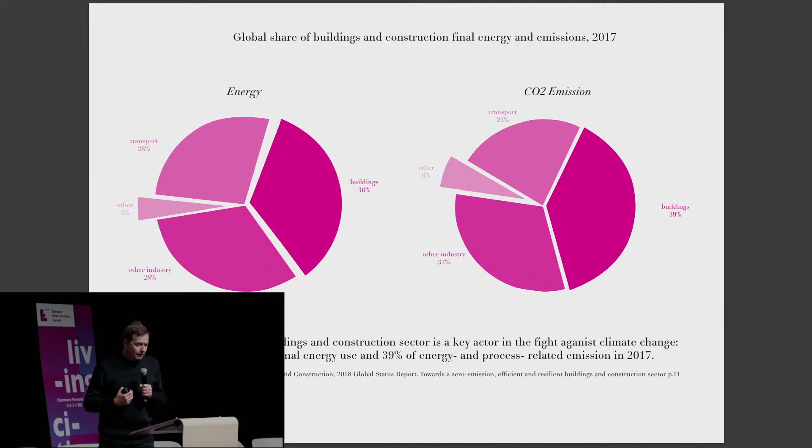So when we are building a house, it's to create a microclimate. Then there is this new condition today. We can see here on the right that 39% of the CO2 emission that is the cause of global warming are coming from the building on the global scale. So it means architects, we are on the front line to fight global warming. And so this is something that is completely our task today.

So we can say, okay, the conditions are climatic. The reason of architecture is climatic, so why could the design not be climatic too? Why we cannot design by convection, conduction, evaporation? Why we should always design with symmetry, with geometry, but not with emissivity, for example? So I'm presenting a series of projects, and I want to create a link with the history of architecture.

I did this exhibition 2 years ago. It will be present in January in Lyon next year, in 3 months. And in this Histoire naturelle de l'architecture, I start to read again the history of architecture based on climatic reason.

And if we take this very famous house from Andrea Palladio, it's interesting because when I was a student, we have only a kind of superstructural approach, an aesthetic approach of this house, and we never understood that it was in reality a kind of climatic machine. And it's explained like that in the book of Palladio.

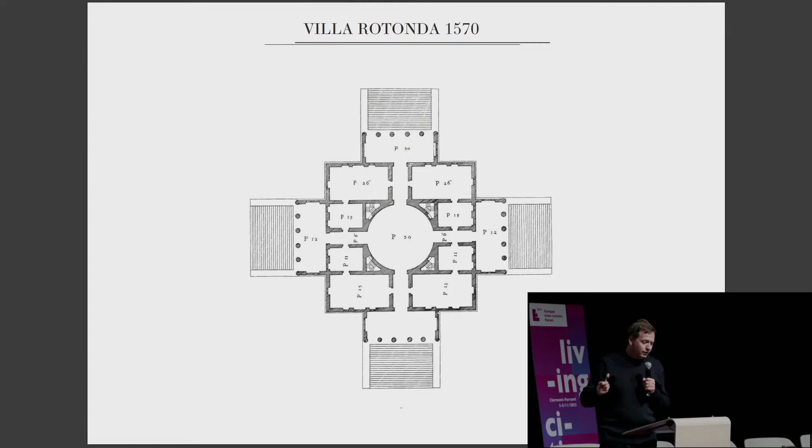And then the portico is protecting from the sunlight, and the sala in the middle is a dome. And this is like by convection, the hot air is always moving up, and so you have to open, and then you remove the hot air, and you keep the ground cold. And on the ground, you have this kind of grid that lets the cold air come from the underground.

So of course the inspiration was that, and it's quite strange because when I was a student, I always heard about the hole in the Pantheon about spirituality, but in reality it's just to let the hot air go out. If not, you are like a cocotte minute, a pressure cooker. So you need to open it. This is a grid for the cold air, and that comes from the underground.

So we did a project based on that. Two years ago, we got the third prize for that in Lausanne. It's called La Climathèque. The building is a small square, so we try to minimize the footprint on the site. It's the small square on the top.

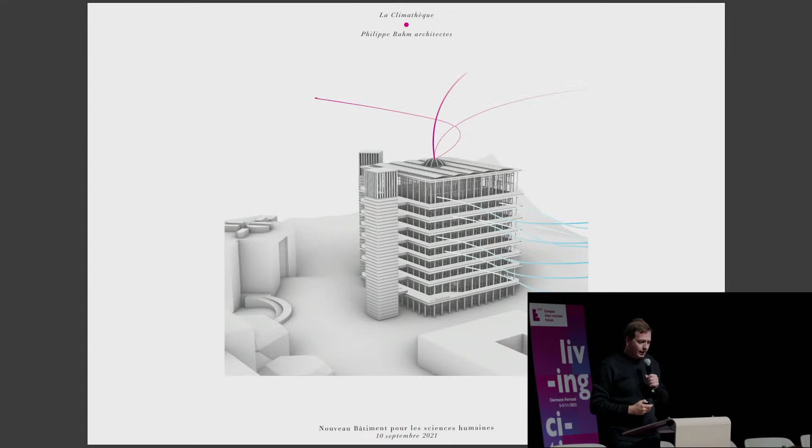We have two strategies, one for the winter, one for the spring when it's not too cold or too warm. So we just open the window, and we have a kind of Palladio sala dome in the middle that lets the air going out.

For the winter or for the heat wave summer, we have a controlled system that I will explain now. So for doing the building, we base it on two poles, like a thermodynamic stratification between the cold area that becomes like a summer refuge against heat during the summer, and at the top we have a greenhouse, creating a flow of air from down to the top.

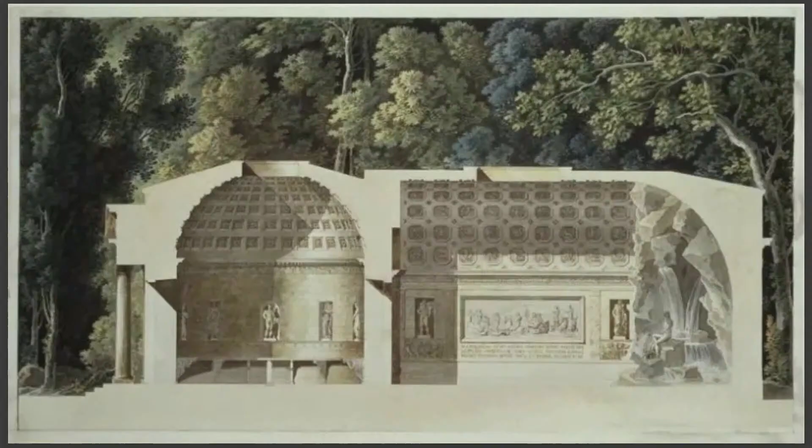The hot air is always moving up, and we took the inspiration for the cold pole from Marie Antoinette's pre-oil fridge. When there was no electricity, it was a milk storage for Marie Antoinette, and it was using thermal inertia.

It was using inertia, escaping the direct sunlight, and also the fountain was creating evaporation for cooling. So we took that. We have the possibility because we have underground water that was just 3 meters down, so we propose to open the underground water, the nappe phréatique, during the summer, and in the winter we close it.

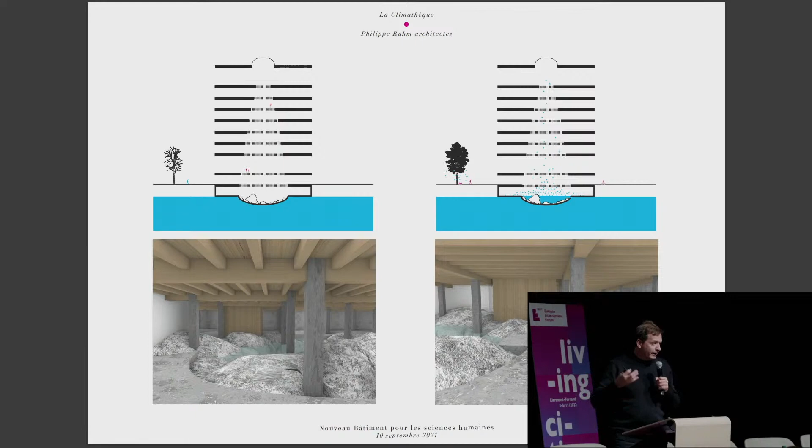So we have this cold water running there, and we create a kind of fountain, a kind of natural cooling underground. Then the air arrives and becomes like a little water pipe, like a narghilé, with the water and the air arriving down, and then it moves up.

We have this triangular form that will always catch the new air, and then it goes to the edge of the building, and then there is a system, and it goes out like that. At the top we have a greenhouse, so this is the system like that.

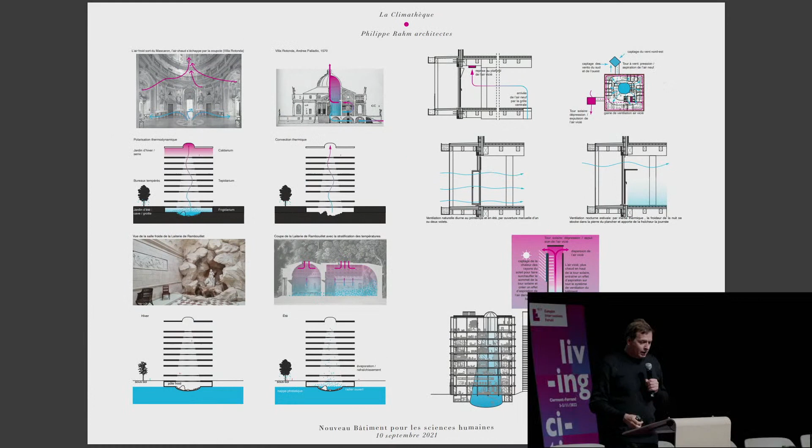There is some more detail about that, but also about effusivity, which I will talk about a little later.

This is a section, and then the plan was just a wood construction, and we can change the partition everywhere. We can see the grid, so this is influence from Palladio. We have this walking grid in the middle.

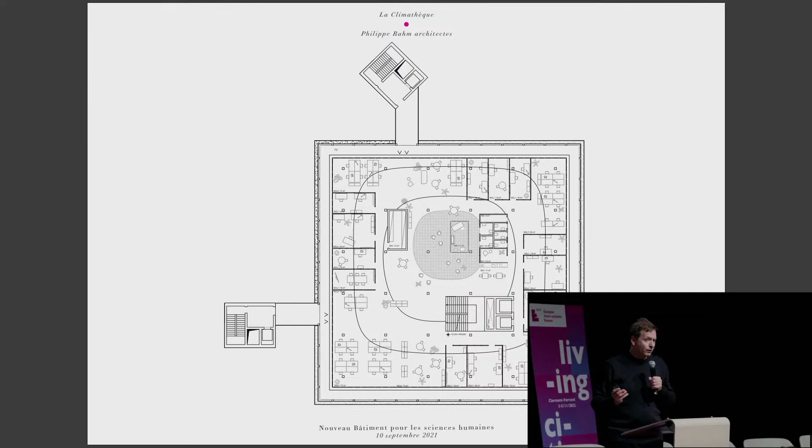This is where we can see the small square that becomes always smaller and smaller, but we can walk on it. The building itself becomes a kind of ventilation duct, so we don't have separate ducts of ventilation. It's the whole building, the whole typology, that becomes this ventilation duct.

So we have an image of that. We can see this grid where the new air arrives and flows through the new space there.

Now I would like to present a project based on effusivity, thermal effusivity. This is a competition we won for the Maison de la Radio in Paris in 2017, for the central area of the Maison de la Radio.

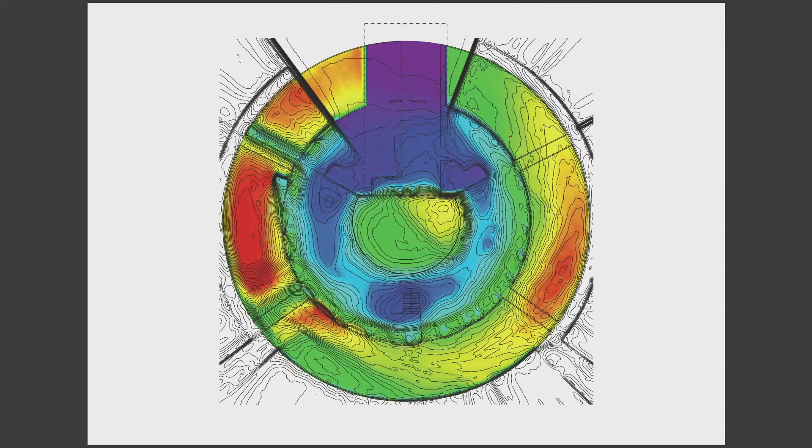The program was to make a public space with a cafe, a theater, a library, a bookstore, and exhibition space. So we start to think about the cafe, and we ask where it would be good to place the cafe in this space.

In the winter, of course, you are looking for sun. In the summer, you are looking for shadow. So we cannot say this is a good place, this is a bad place. We should build a kind of gradation of climate.

So we did a sun analysis during the year, a kind of synthesis of that. Where it's red, there is a lot of light. Where it's blue, there is no light. And from that, we transform that into form.

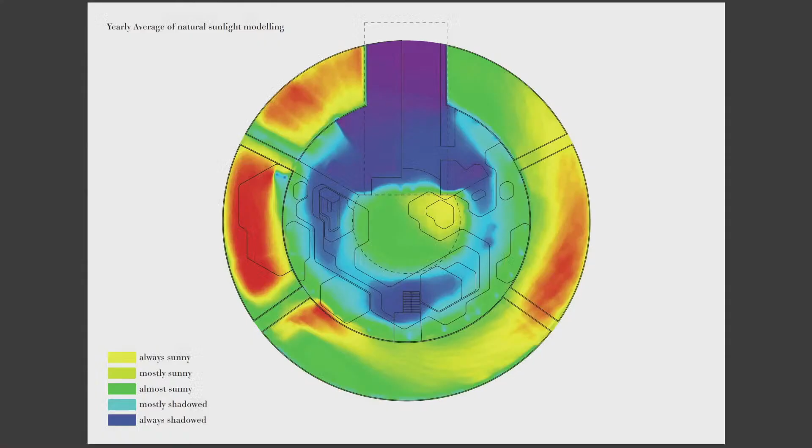And then we materialize this form by effusivity, thermal effusivity. Thermal effusivity is something people knew before, for example...

When Viollet-le-Duc visited San Pietro in Rome, he talked about the coolness of the basilica, and about the choice of the marble, because it was a cooling material. When you touch marble, you feel it cold, and the choice was to create, like in the milk house from Marie Antoinette, a cold house by choosing a high effusivity material like marble.

Of course, if you are choosing wood or wool, you are cutting the effusivity. The thermal effusivity is very low, so you keep warm by placing wool. In reality, we have lost this thermal choice of material, because during the last 50 to 70 years, we chose material only linked to aesthetics. We say, okay, I like carpet, so I place a carpet. I like marble, I place marble. But we've completely lost the relationship between cooling, warming, depending on the material.

So what we did for this competition is we mapped the space by high effusivity material, where we are looking for coolness in the summer, and low effusivity material when we are looking for warmth. So this is warm, low effusivity, shown in red, like wool, and the high effusivity is blue.

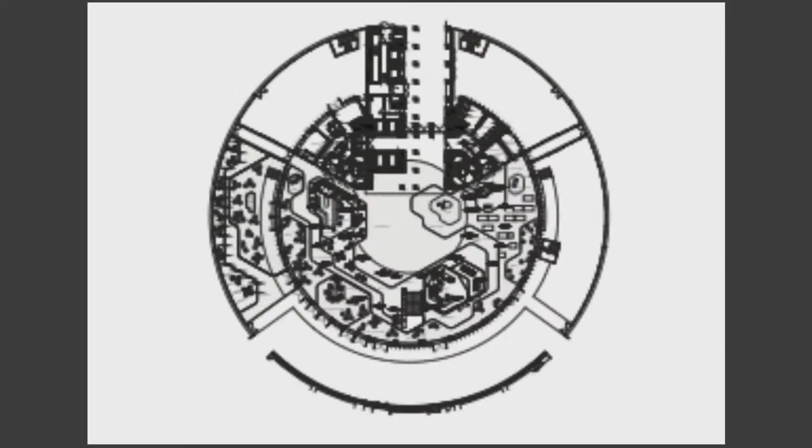And so from that we transformed the interior of the Maison de la Radio, of the center, by mapping it with these different materials. So we can see the wool, and then the wood, and then rubber, and marble, and steel in the middle of the space.

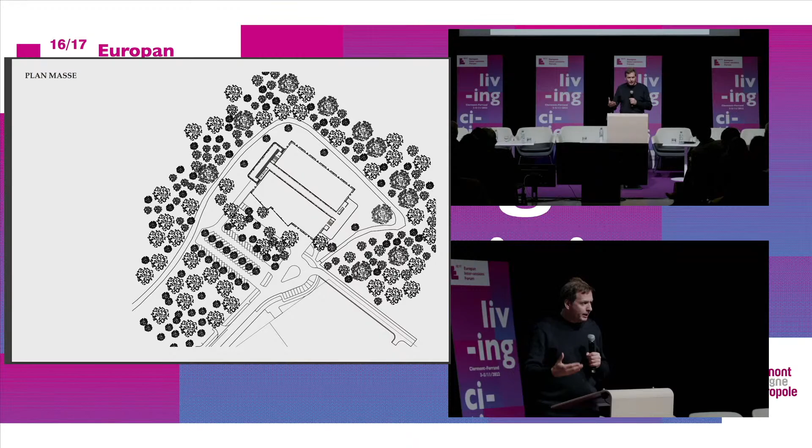Just very quickly, a small building we are working on now next to Geneva. The idea is, in reality, to prepare the air, because there is ventilation, there is heat, and so we propose to recombine the question of climate with the question of architecture. So the ventilation preparation of the air becomes a public space of the office building, and we propose to have two public spaces: one will be the grotto, and one will be a greenhouse.

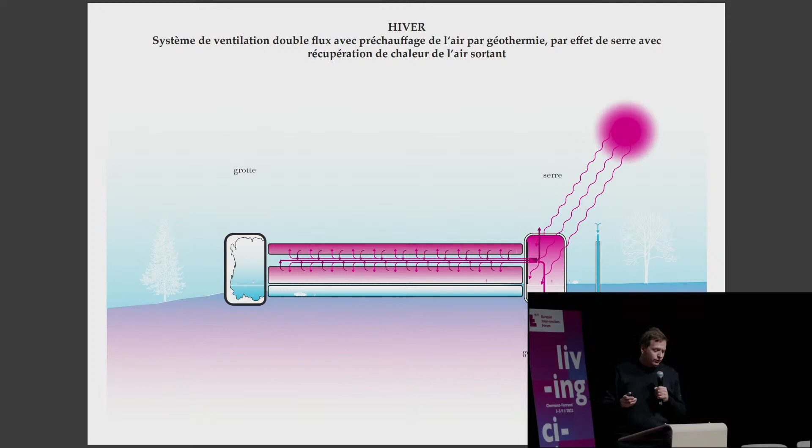And so the greenhouse will work in the winter to prepare the hot air, and then it goes with the ventilation to the office and factory space. And then we can see the system.

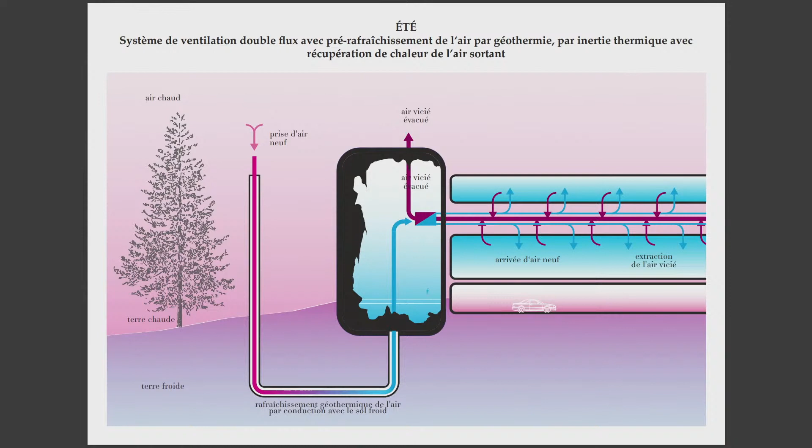And then for the summer, we are using the grotto. The grotto is placed on the north, and we are cooling the air there by thermal inertia, by evaporation, by mostly natural systems without electricity. And then we use this cold air for the ventilation of the building.

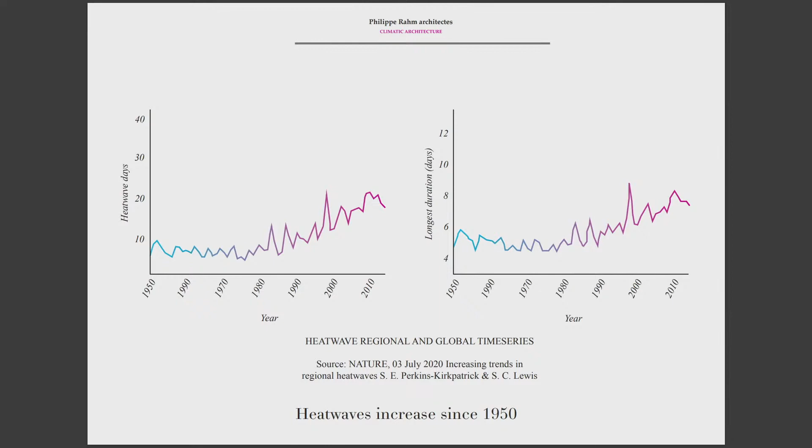Now I'm presenting some urban and landscape projects. So first, this is the new condition of the city: the heat wave increase. It's become more and more hot in the city, and also in Switzerland or in Europe. It was less warm before, but now there is some trouble in the summer. The temperature will grow more and more in the next years with global warming.

So from that, I'm presenting two projects. One project is a competition we won in Milano with Rem Koolhaas, with OMA and Laboratorio Permanente in 2019, for two districts, Farini and San Cristoforo. And the idea was to do public space for this new district that combines not only social quality but also environmental quality. So we say we will introduce an environmental infrastructure for defining the new district.

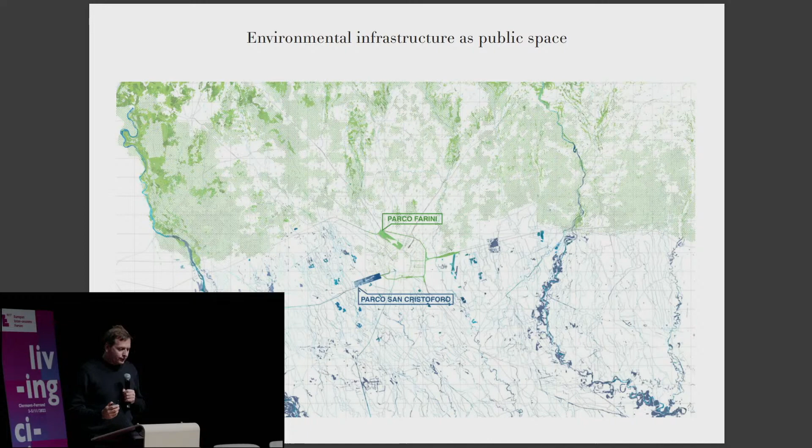So this is what we call limpidarium, like cleaning, limpidarium d'aria, cleaning the air or cleaning the underground water of Milano. And so we place these two limpidarium as the main reference of the new district, like the new plaza of the new district.

For Farini, it was an abandoned train station, well, not a station, but a repair depot for trains. And so from that, we can see that when we did the competition in 2018-2019, during the summer of 2018 it was extremely hot also in Milan, with a very strong difference between the south, where the wind is coming, and where the wind is finishing.

You can see that the urban heat island effect is really warming, you know, when the wind arrives it becomes more and more hot. And also the pollution - if you want to buy an apartment in Milan, you have to choose the west and the south, not the north, because all the pollutants are going there, and also all the heat is going there.

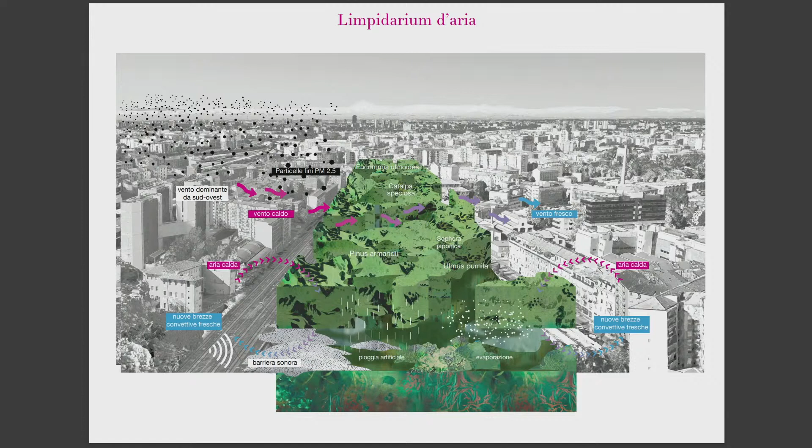So we propose this limpidarium d'aria. The new district will be based on a kind of environmental infrastructure, and the task of this infrastructure will be to cool and clean the air. So for doing that, we are using all the possibilities we have for creating shadow, having a high albedo surface like white surface, creating evaporation - the change of phase from liquid to gas - to reduce the temperature of the air.

So it's why in Spain or in Italy or in Morocco you have a lot of fontaines, because it's like a cooling machine.

Then we propose to create the most cold pole that can be the starting point of the new wind. So the idea is to create an urban wind that will form, because it will be hot - the wind is always created when you have a cold pole and a warm pole, so it creates a movement of air by convection. And so the air will move and create a freshness inside the new district, and also it removes the pollutant by doing that.

And also we have some solutions for catching the pollutant of the air by having some specific type of trees. And also, if there is a high pollution episode, we can have artificial rain so that the PM 2.5 will fall down with the rain.

And then, like often in our project, we did some CFD, computational fluid dynamic models, to analyze where the wind is going. And with OMA, we propose a new typology of building that always lets the air move through, so we don't have a dead-end district - the air can always go through all the buildings. We found some old typology of Milan that was a little similar to that.

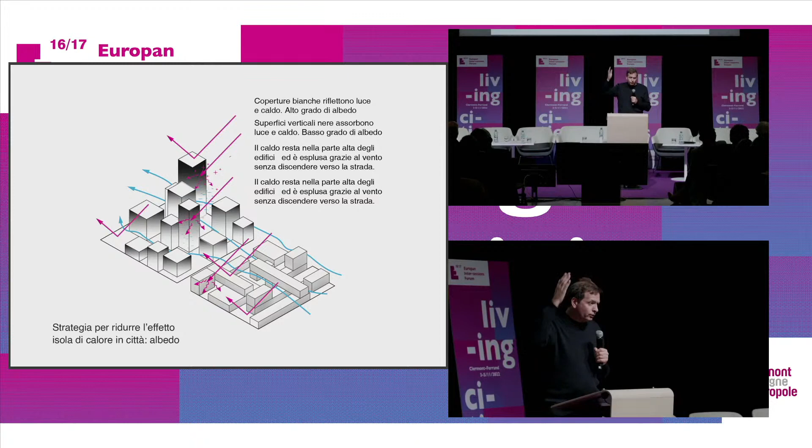If I want to cool the city in the winter and in the summer, I need white surfaces to reflect the light, but not everywhere, because if you have a white surface also on the vertical, the light will come down and overheat the street. So that's why we propose to have at the top of the building a black area that will be like a trap for the light, so it cannot go down, and only the horizontal surfaces will be white to preserve the street from the excess of heat.

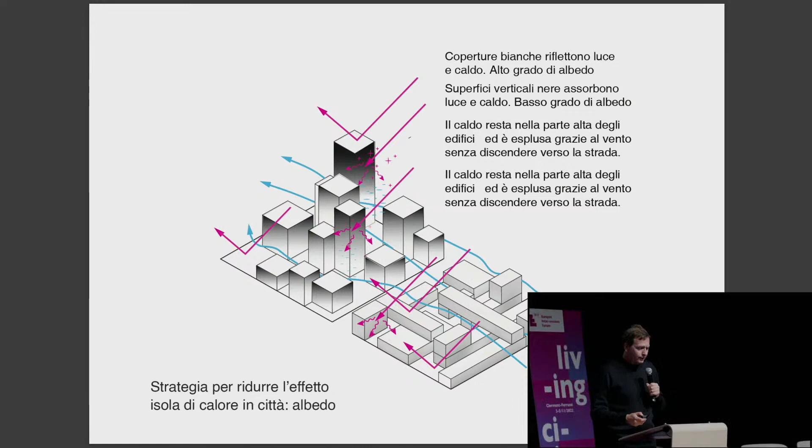So finally, we have this project, and then in this we have another element that was for cleaning the water for the underground by phytoremediation, and so we propose to have an open swimming pool there.

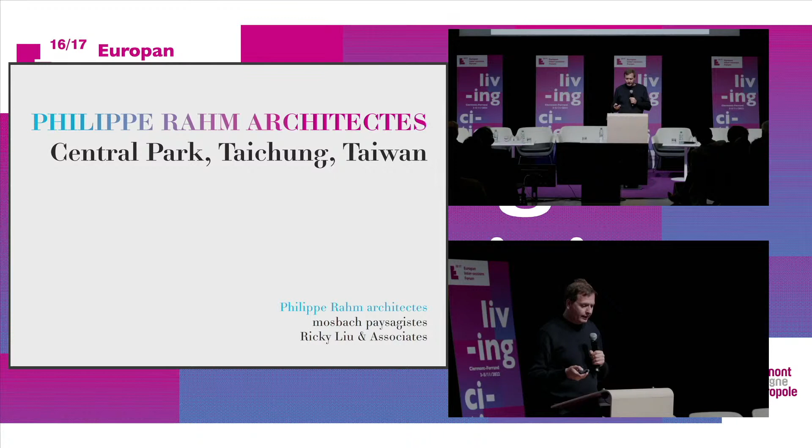So over the last 10 years, I have worked a lot on this very important project. We won this competition in 2011 with Catherine Mosbach and Ricky Liu in Taiwan. It was a 70-hectare park.

And for doing the master plan, we already worked on the climatic idea. So we say why we need a park - in history, the park was for cooling and for cleaning, it was like that during the 19th century. And so we take again this idea to propose some open space for the citizens where they can enjoy the outdoor, but also be protected from the excess of heat.

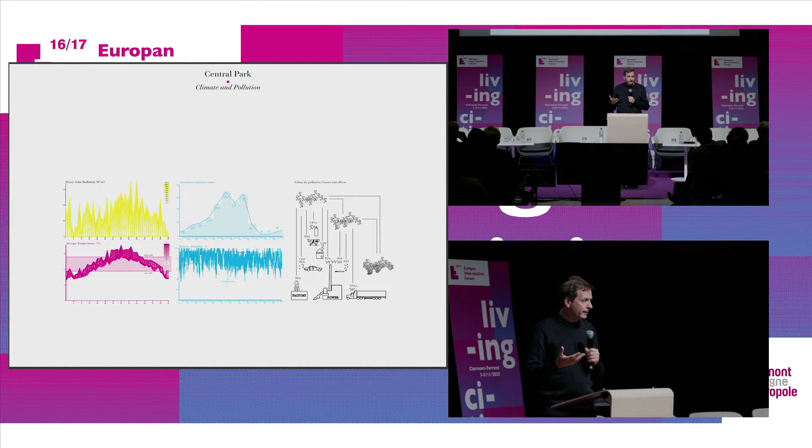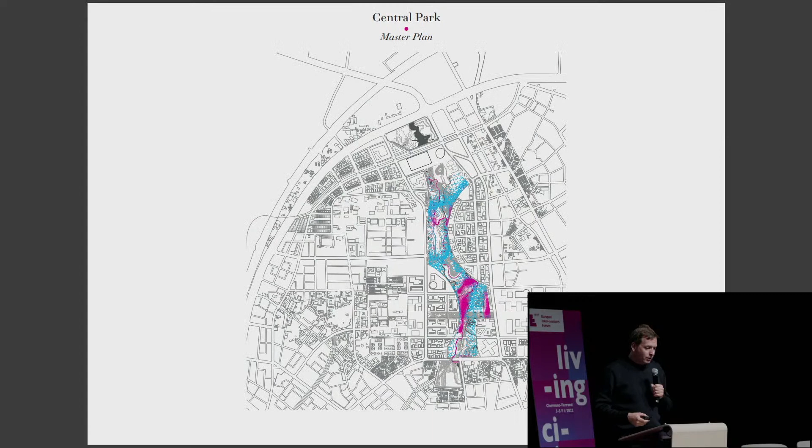In Taiwan, it's a tropical climate where the sun is very strong, it's very humid, and it's polluted also. We propose to work on these 3 layers - independent layers on heat, humidity and pollution - and to create the master plan based on that. So this is the final master plan. But for doing that, we first worked on the heat.

So we analyze where the wind is coming on the park. It's like when you blow on soup, you cool the soup. So when you have a north wind that arrives on the site, where it's red here, it will be more comfortable for people to be there.

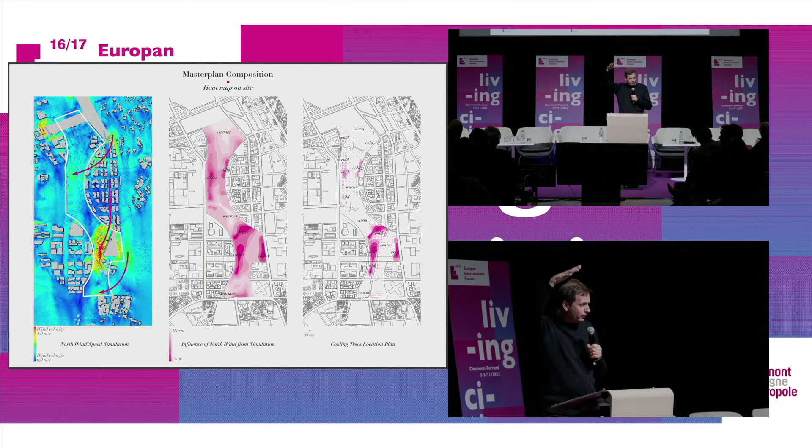We map that with simulation, then we transform that into a plan, then into activity and into trees. So where it will be cooled by the wind, we double this cooling effect by placing shadow, which is why we place a lot of trees there.

We propose to have all the leisure activities in what we call the coolia, the most cold area of the park. And then we have the cool path, which is the most cold path of the park.

We choose very precisely the trees, for having trees with a lot of leaf or big leaf, to create a large shadow. And also a type of ground that cools by evaporation or by high albedo material.

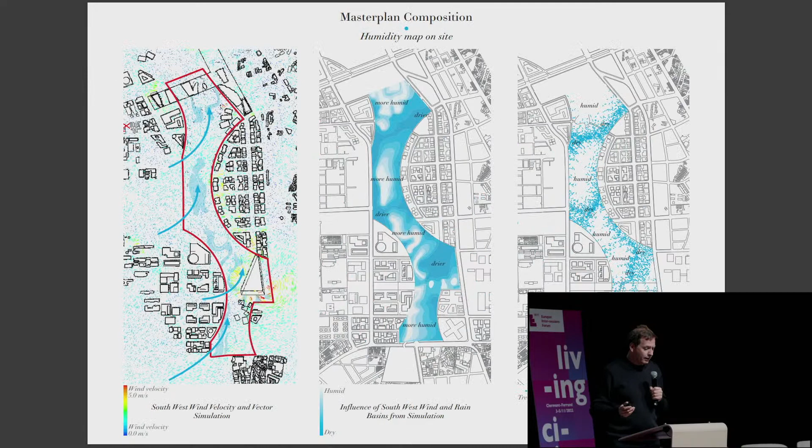And about humidity, all the material should stay on site. So the topography is in reality made for managing the rainwater, so all the water from the new district, the 250 hectare district, arrives on the park, and we manage that there.

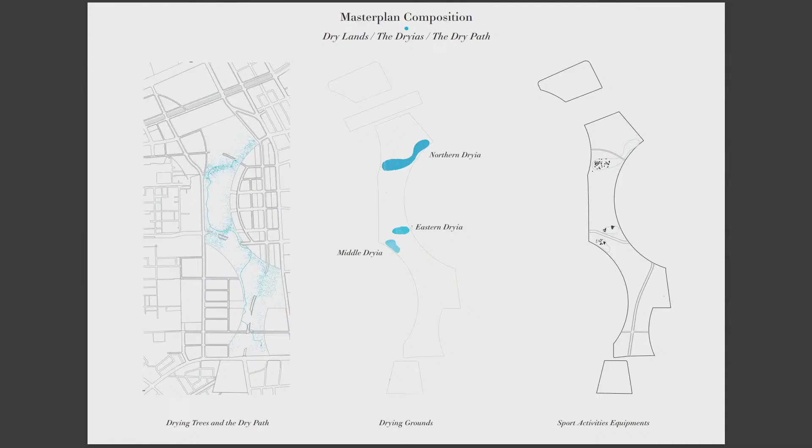Then we have a last layer. This is like the drying area, the dry area becomes the Dryia, and we have high drainage material for evacuation.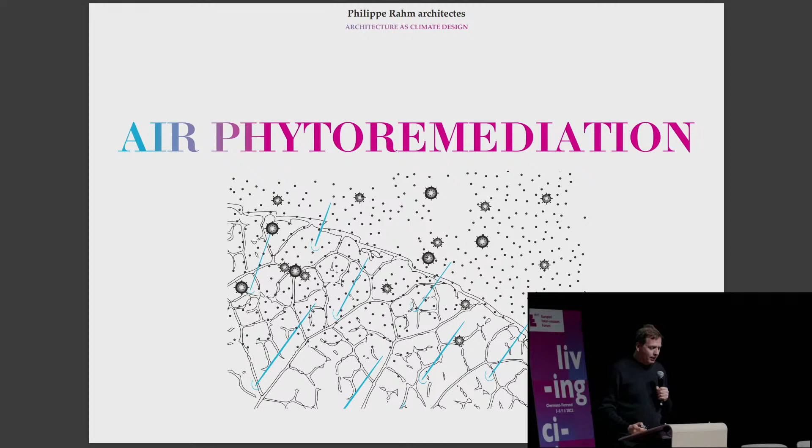And then we have the final layer, on pollution. We map where there is more noise, more pollutants linked to the road. And far from that, we propose to have trees that will absorb the noise, absorb the pollutant.

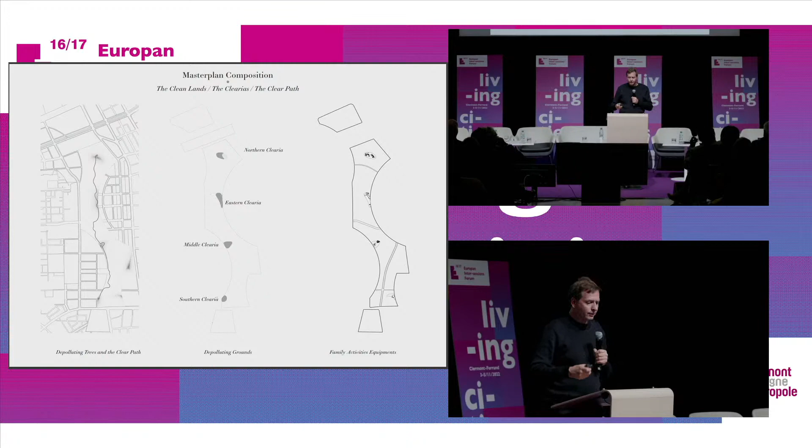And we propose to have all the children's activity in this place, so the children's playground finds place in what we call the clearia there. This is the map of the trees that are always working by gradation.

Finally, we overlap these three maps, and it creates a diversity of microclimate. So it can be hot, dry, and polluted, or cool, humid, and clean. So you are free to choose where you want to go, and it gives a diversity of landscape.

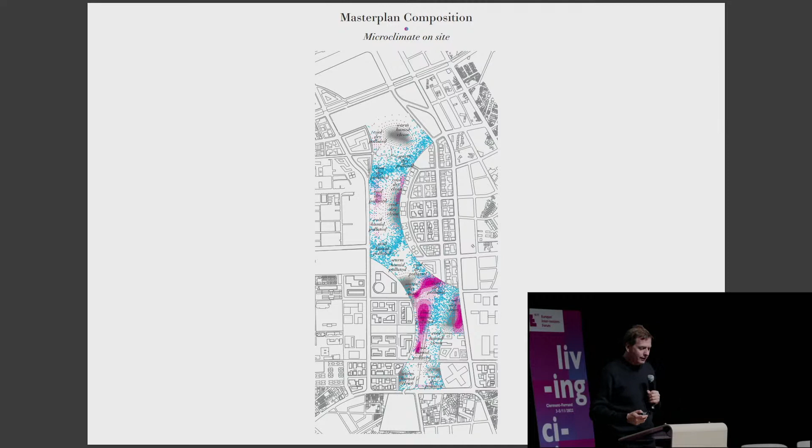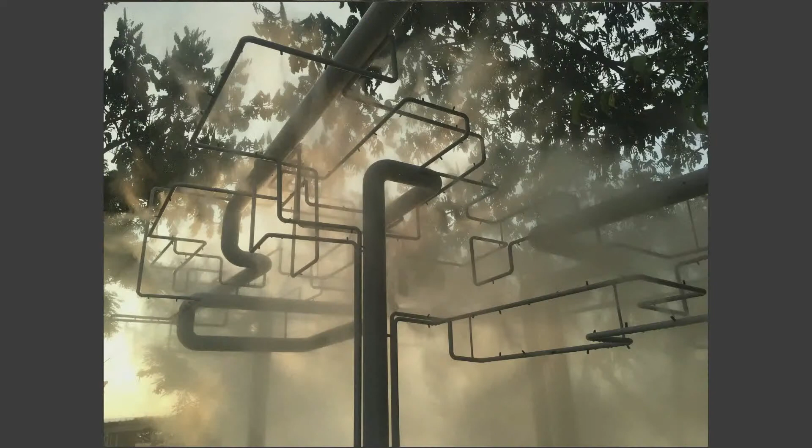And we have also what we call the climatic devices. This is like creating mist or other different strategies of cooling. And inside the park, we have 10,000 square meters of photovoltaic panels on the north.

All the electricity is produced on site, and more than is required. So we propose to have a kind of canopy of photovoltaic panels, and under this canopy we have buildings, we have landscape, we have a car park, and so we can see this space.

That is creating a kind of less heat, it's less hot, and the excess of heat is used for the electricity.

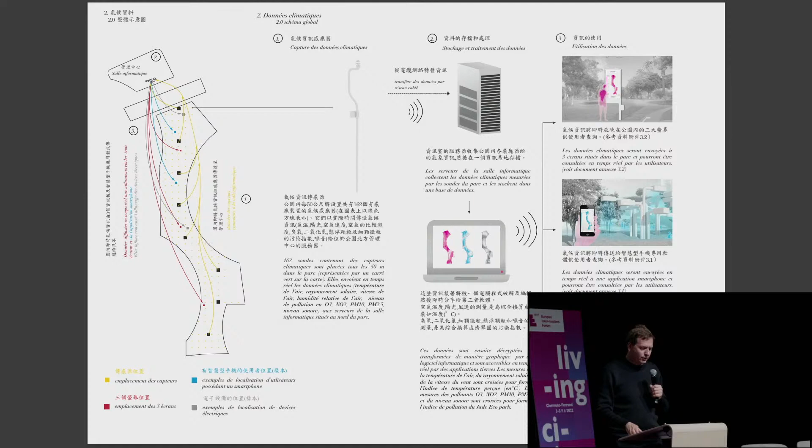And finally, we have also every 50 meters a meteorological station, a climatic station that measures in real time the temperature. So we can see that.

So we are measuring the temperature with the humidity, all the pollutants, and we are creating an index, by air temperature, wind speed, sunlight. So we are mapping that, and we see where it's more hot or more cold in the park.

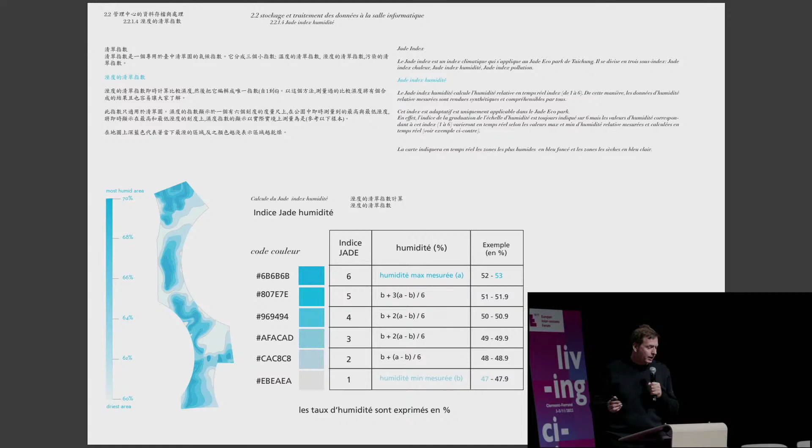So you have information in real time, some very small information about that. It's the same for the humidity of the air, where it's more dry or less dry. And then for the pollutant, so you have O3 and NO2 and PM2.5 and noise, and it creates a map where you can see where it's more polluted and less polluted.

And this goes on an app. On the app, you have information about the climate in real time. So we have also designed that, and we can see the heat map, humidity map, pollution map.

And you have information on where you are, you can see the temperature, and you could decide to go to a more cold area or less cold area, depending on if it is noon in July, you are maybe looking for coldness.

If it is 6 p.m. in December, maybe you are looking more for heat. So this is the kind of information there.

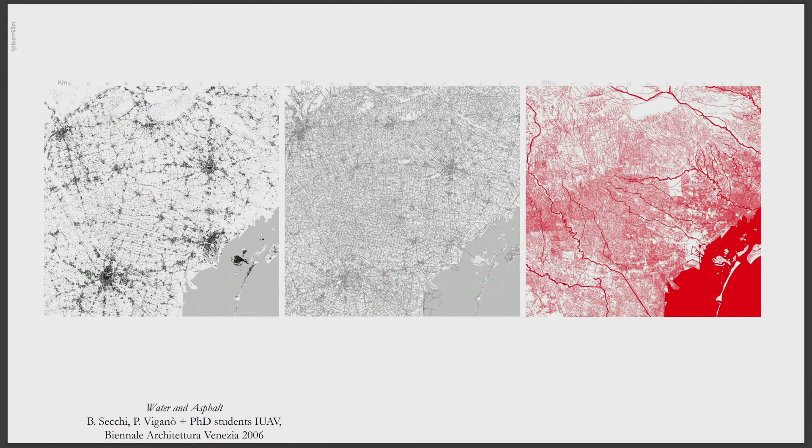That have designed this territory in a very isotropic way, so you can find the same conditions in more or less all directions. In fact, when you look at this map, the one on the right is the water, the one in the middle is the street, the roads, and then you have the built areas. So we understand that this sort of confused settlement organization, what has been described in terms of the diffuse city, is very much connected to the water design. Water and streets work together, they go in parallel very, very often. And you understand that there is this very diffuse infrastructure related to water that is organizing all the territory.

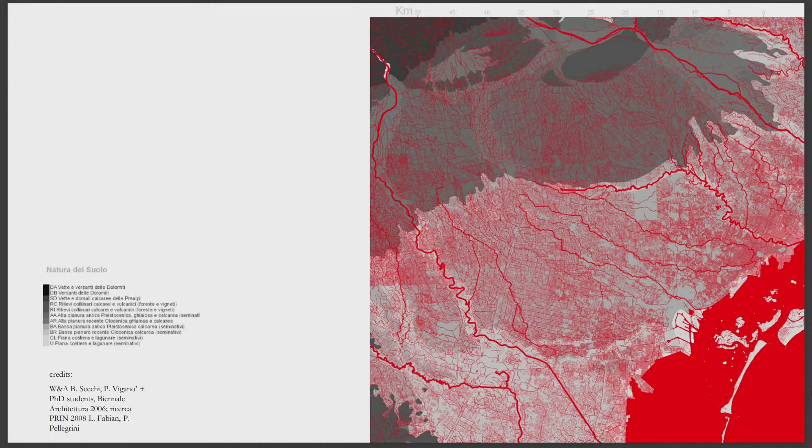And of course, when you cross this with the type of lithology, you understand that there are very permeable areas, those in the north, the dry plain. There are less permeable areas, and sometimes the water tends to stagnate there - that is the mid-plain, which is much less permeable, there is a lot of clay. And then when you arrive close to Venice, you see the density of the water elements becomes really incredible. There we are in a condition of polder, like in Holland, so we are until 4 meters below sea level. There you have a mechanical system that will pump the water outside of the fields into the lagoon. And then, of course, there is Venice with all its problems related to the water.

You start to read the territory with different eyes. As I always say, we need to take the position of the water. If we want to understand the water, you have to put your eyes where the water is, at the height of the water. And by following the water, we understand the enormous amount of work that has been dedicated during millennia, centuries, to make our territories inhabitable. And we can also understand how today this process, this rationalization, has to be rethought because, of course, we have less water, and we may have to use water in a different way.

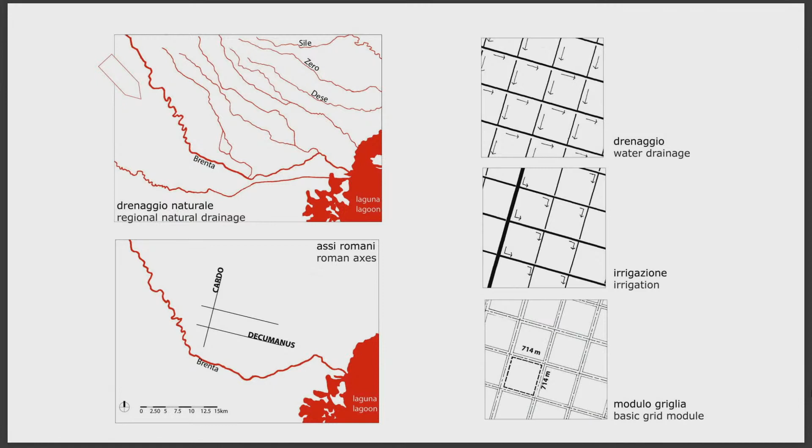What is important is to understand that this territory has been created and designed by these forms of infrastructure. You find them into the territory because those geometries, those tracés, they are still there, still visible. We understand that they are able to organize something that is so scattered, so disorganized, so chaotic. But because of the water, you can find rules, measures, things that repeat, and that's really given by the water's presence, which constructs also specific landscapes.

This is, for example, the way in which a sort of bocage is along the water elements. I would like now to dig a little bit more into one part, the dry plain I showed before. In the dry plain, you have hundreds of gravel pits because there is gravel that is extracted, and many of them are abandoned. There will be in the future a slowing down of this extraction activity, but nevertheless, today, this is still present.

So the scenario we constructed with a group of hydraulic engineers was to imagine using these hundreds of abandoned gravel pits in a way to stock water in this dry part of the plain, and imagining using this water coming from the flooding moments in the summer to help the agriculture to survive in the moment of drought.

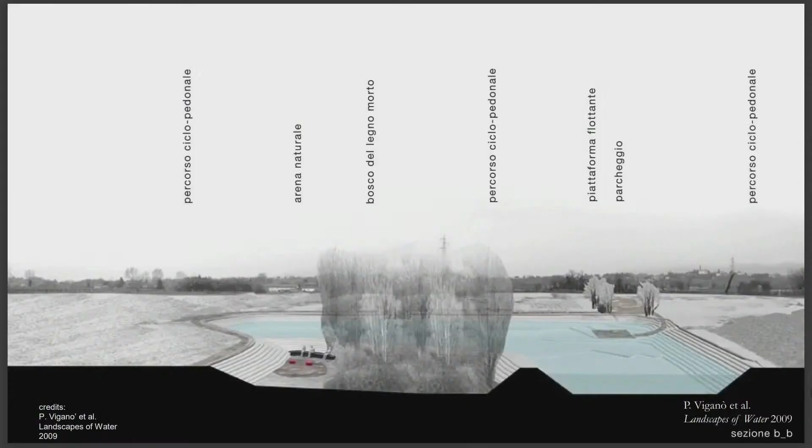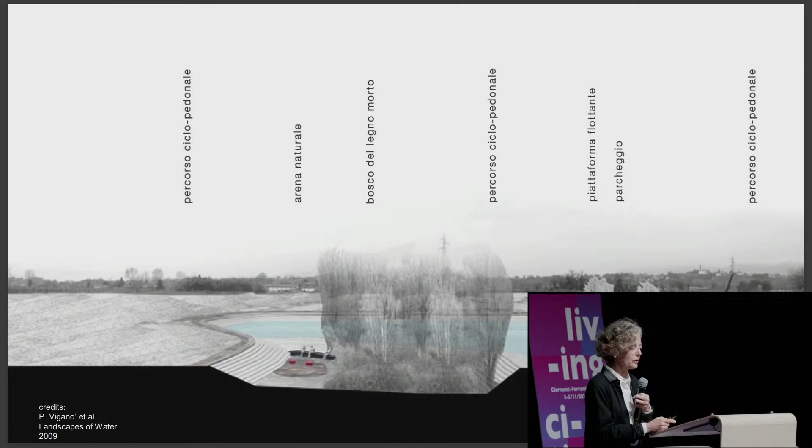You can imagine using this space to collect water in the flooding moments and reuse it in the summer, which is also a way not to use the water from the alpine lakes that are very much under pressure in the summer because they are also very touristic. So the best is to let the water stay in the alpine lake and to use, on the contrary, this water. If you put together these hundreds of gravel pits, we can accumulate several million cubic meters of water, which can have a very important role in the summer periods.

But of course, this is also a way to construct a public space, a territorial public space maybe, that is connected with other public spaces, the bike path, the small centers, the sport fields. This becomes part of a public space structure at a scale that is not the traditional urban scale.

With this small example, we can reconsider the whole section from the Alps until the lagoon and rethink completely the role of water. In the first part, you understand that there are the gravel pits, but then we can imagine reforesting some parts. We can imagine reopening some of the lower parts that were reclaimed. So it was reclaimed. Now we can abandon the reclamation and go back to the water.

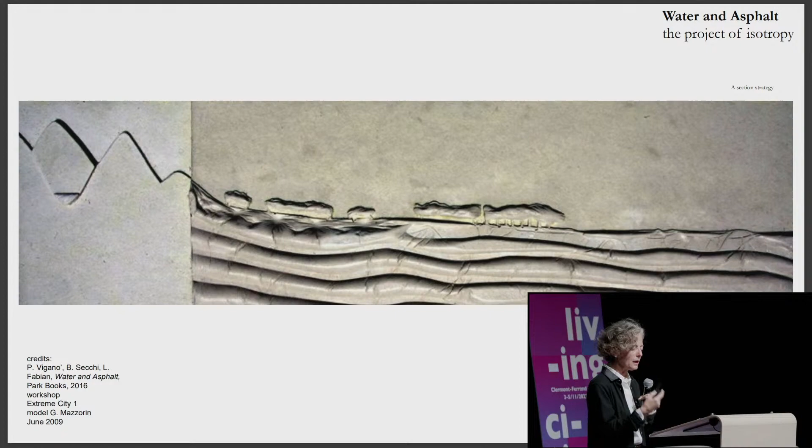There are several rationalities inside this type of project. One of them is a political rationality because, as I said, water is a subject, a kind of political subject. By working on this isotropic territory, respecting this isotropic condition, is a way also to solve some of the climate and social issues in a way that is much easier and more interesting than going back to traditional big works, big infrastructures to solve, for example, the problem of flooding.

What I learned from this first chapter of experiences is that by working with water, you are obliged to read the territory. You are obliged to understand and unveil the rationalities that are present in the territory. And then you start to work with designs that are always multitask. You're never thinking of one element, not just the flooding risk.

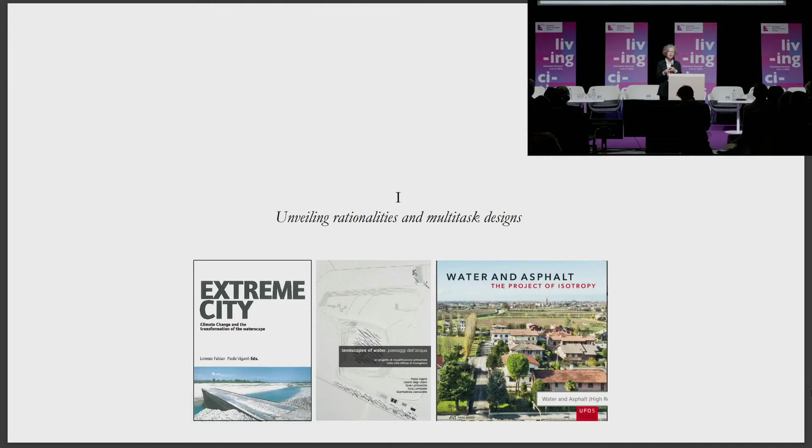You have always the drought, for example. You have always the public. You have always the social aspect. So they are multitask design, but especially I insist on the point of unveiling rationalities. We have to understand if the rationalization, the processes of transformation that we have deposited on our territories, are still working, are still adapted, or they have to be transformed in the future with climate change.

A second experience is a study we made in the first Euro metropolis, the area between Lille, Tournai, and Courtrai. So it's two countries, France and Belgium, three regions, and two languages.

In this region, there is a lot of water, a lot of water. At the beginning of the 20th century, Vidal de la Blache wrote in the Tableau de la géographie de la France: là est le trait commun. So there is the common trait — water as a unifying element.

And that's very important, because it's not clear to anybody why there is a Eurometropolis, why this big perimeter connecting countries. Maybe by observing the proximity of each village, each city to the water, we can understand this common heritage, this common presence, and start with the hypothesis that in this region, water is the unifying element.

But once you have said that, we have to understand that the two nations nevertheless represent water in different ways. Here you see on one side a map made by the Cassini family, between the 18th century and the half of the 19th century.

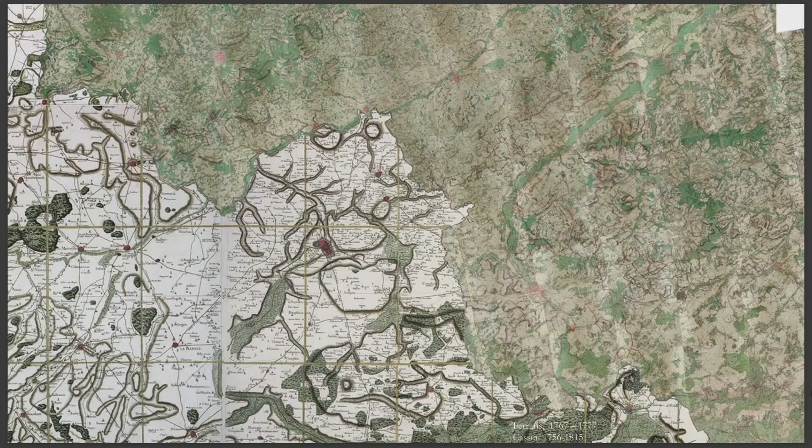This is a flat land, so you can see how the Cassini were representing the topography. It's a flat land, everybody knows, now around Lille it's not really so. But in fact they represent it like enormous canyons, like valleys, because it was fundamental to understand how the water was moving and where the water was going. I think this is an incredible representation, but it's just giving you the idea of how you can represent water.

On the other side, we have the Ferraris map, same period more or less, where you see the water through all the wetland. These stripes of green are the wetland, and then you understand that there are several rivers along those green stripes.

But the problem is that even today, it's not easy to connect the two representations. This is incredible — we speak of Europe, and here is Europe, and we cannot merge the maps about water. We are still in this situation, and that's why we start with the idea of an atlas.

The second hypothesis, apart from the first unity through the water, is that by working with the water we can work on a different type of infrastructure for the contemporary city — not the strong infrastructure of the past, although we can reuse some parts of those, but more a weak infrastructure. Why is it weak? Because when we use the term 'subject' for the water, we know that subject is connected to many similar words: subjected, subjugated, violated, victim, fragmented.

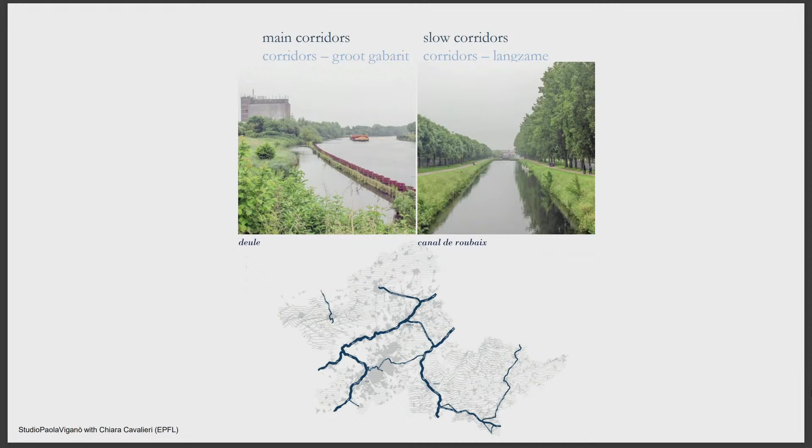We have the main corridors, today part of the Paris-Northern Sea big corridor, where big goods have to pass. A lot of big infrastructure has been realized for this faster type of corridor. But I want to speak of the slow corridors, those that remained aside, that today are not practically used anymore, but which are nevertheless still very, very important inside a territory.

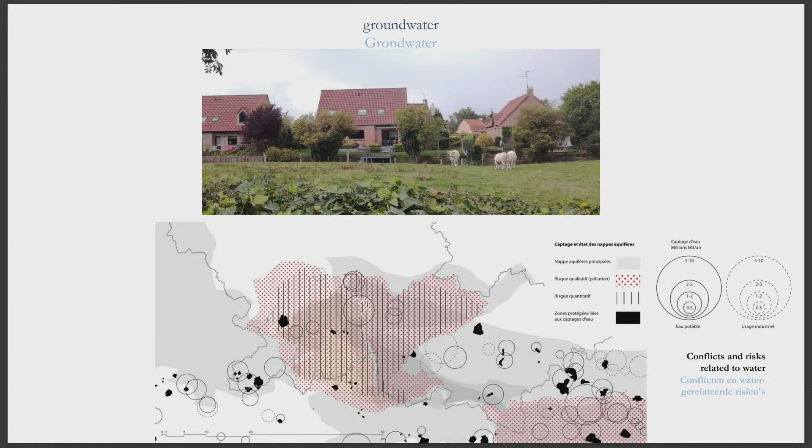The capillary system are the very small watercourses. They are everywhere, everywhere — all the territory is close to one of them, and they are really into the diffuse landscape. Then there is the water you don't see, but that is fundamental to be understood — the groundwater. There, too, we could understand a little bit the conflicts and risks related to the water, and the exchange of water between different regions.

The actors, when you work with water, are a plurality, a very vast plurality of actors. Especially in a trans-border situation, you have really lots of different actors. And this is just those directly connected to the water, but then you can add all the other actors, the cities, all the infrastructures related to water. There are so many other people around, let's say, the table. That's the fundamental difficulty when you discuss water. You have to open a very wide debate about any decision concerning water.

So some images about the type of work we made with the different universities, especially the university working there, but also bringing students from other universities. Here we are in Tournai. You see the whole water system designed on the floor, and that was a very nice experience. We met on site all the different water actors. That's also very important, that you can be on site with the different actors. And of course, there are the spaces related to water, the blue space, which, as in this case, is a protected type of space, a heritage space, and is extremely beautiful, a cultural landscape. And here you meet a lot of questions.

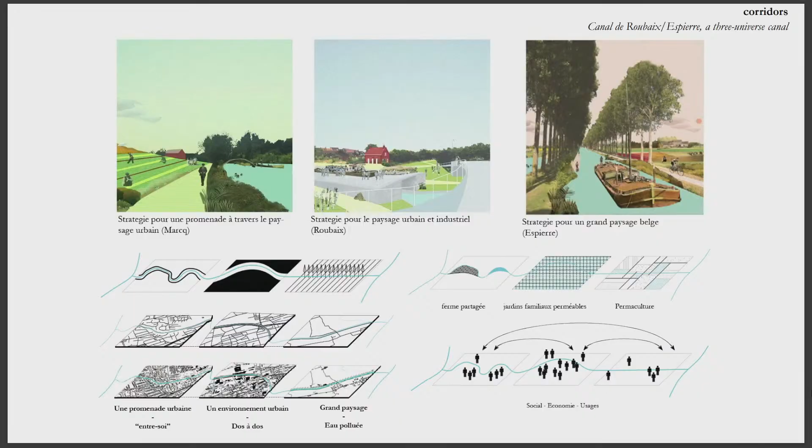In Lille, on your left, you have a kind of middle-class city with a little bit of green space connected to this part of the canal. In the middle, you have a terribly poor part where the immigrants live, where most of the pollution is concentrated, industrial pollution, I mean. And in the last part, where I took the picture, it's where the richest live, where the landscapes are the best, etc. So by working along the water, it doesn't know about social differences, not political differences. The water just passes through, and then you can really understand how to reflect on different social conditions and how this continuity of the water could construct new relations or new links.

And going towards the capillarity, the capillarity is this type of landscape. You see and you don't see the water, but you see that there are salix. You understand that's a low and humid area. And they are, as I said, everywhere, and really in very close relation with the basic structure of the territory.

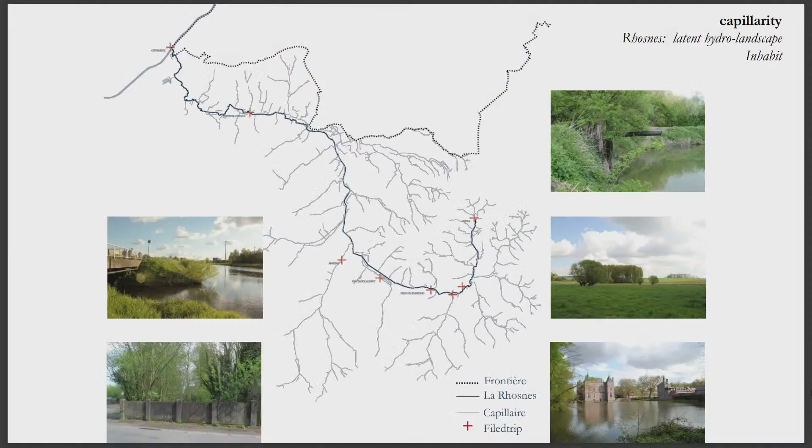In the Wallonia region, many of the waterways have been completely modified or are hidden today, and many of them are polluted. Here you can see some of their shapes. Each one of them has a name—they're really subjects, let's say.

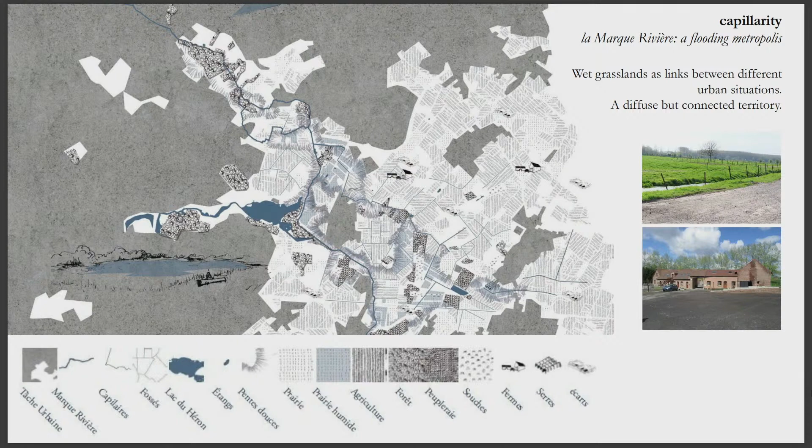In the case of Lille, a bigger city, a metropolis, you understand how the water is still entering the denser part of the city, bringing this humid wetland into connection with the rest of the city. You can reflect on the ways in which cities are thinking about their relation with water.

The hypothesis of densifying cities is still today very present in many cities in Europe, and the pressure exercised on the waters is still very high. You really have to reflect on the way in which the city wants to meet the water, and this relation has to be reconstructed.

Maybe we have to accept a certain level of resilience, in the sense of accepting some part of this water, rather than imagining constructing around the water like using it as a central park. Waters need more space—they cannot live with big walls close to them.

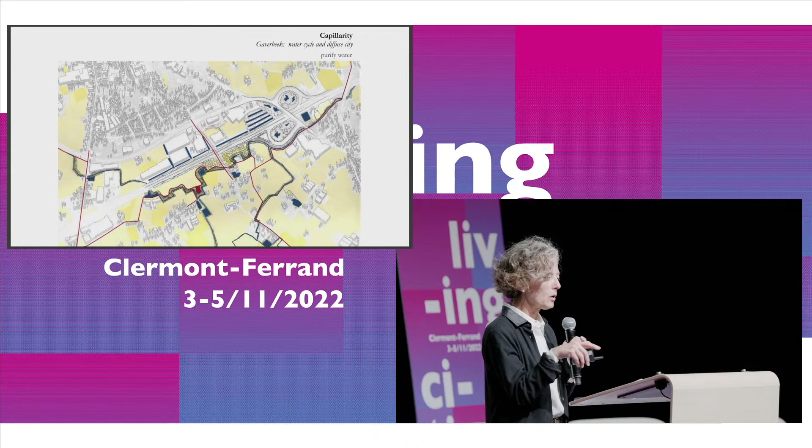In the Flemish region, you have many of this capillary system, together with this very diffuse type of city and a lot of industrial areas, where you can work on new water cycles, purifying and collecting the water. The Flanders region—I don't know if there's someone from Flanders here—is really threatened by climate change at a very high level.

The drought will become extremely problematic for Flanders. It's already problematic, but it will be even worse in the future. So the idea of collecting and purifying, working on industrial zones, for example trying to re-qualify them through the water, is a very important theme.

This is also important because you need to bring some water into the groundwater. For example, there is a superficial groundwater that is not easy to use today, while the very deep one, the one in the sand, is completely polluted and practically impossible to use. So the reality is that Flanders has no groundwater that is usable.

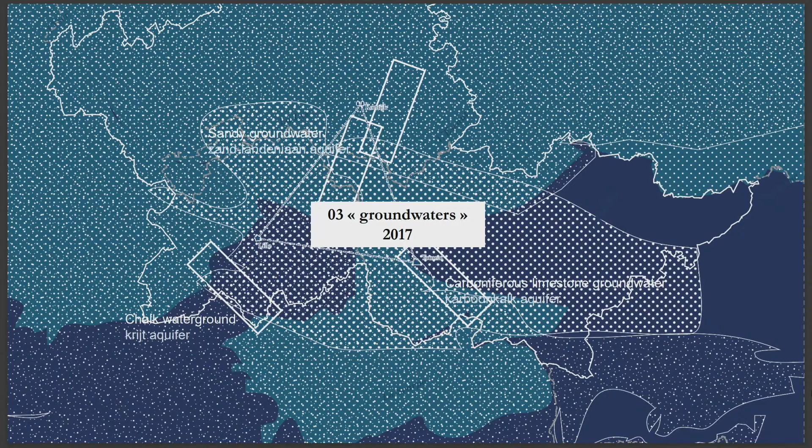That's why it depends on the Lille region in terms of fresh water. This has economic, social, and political consequences. As we know from scholars like Maria Kaika or Swyngedouw, there is a very strong political question around the waters, and we understand that territories will be much more dependent on this type of exchange in the future.

That's why we decided to dedicate one year of our study to the groundwaters, which are extremely interesting in this region because there are several types and levels, and some of them have been completely exhausted, like the limestone groundwater.

On the French and Walloon side, the one that is exploited today is the chalk groundwater close to Lille. The one in Flanders, the sand groundwater, is completely unusable. So you really understand that territories have very fundamental differences, or a lack of balance, and this will be more and more a political subject in the future.

The catchment fields around Lille—part of them are already a park. But of course you cannot imagine that the city administration can buy thousands of hectares in order to protect all the water infiltrating into the territory.

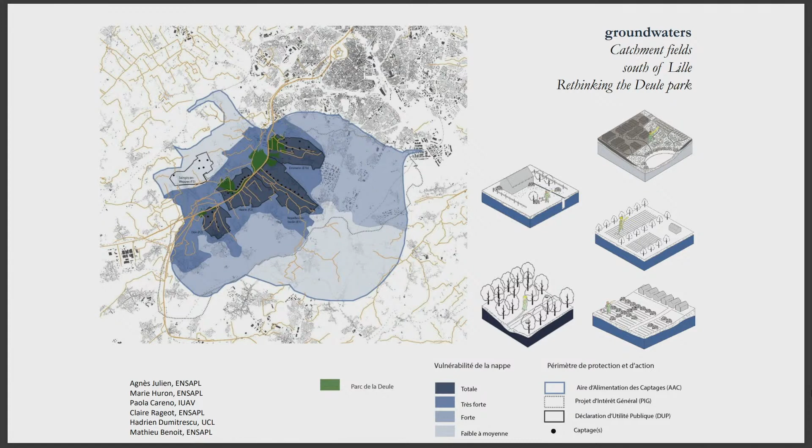This means that all the territory has to take care of any drop entering and infiltrating into the soil, which means that in respect to what is on the land, you have to imagine rules for how to use this territory according to the necessity of protecting the water table—working on a very protected type of infiltration.

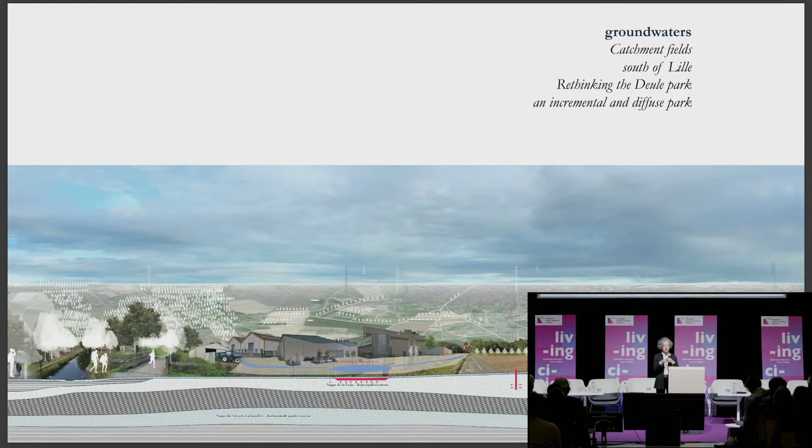So you cannot infiltrate unless you are sure you are not polluting the groundwater. For example, on industrial platforms you cannot infiltrate—you have to keep all the water separated—while in other cases you can infiltrate and replenish the groundwater. Again, this touches all the territory at different scales.

This is a last case where we understand there are a lot of industrial areas between France, Belgium, Flanders, and Wallonia. But the Wallonian industrial areas are flooded when it's raining, while the French industrial areas are abandoned and polluted.

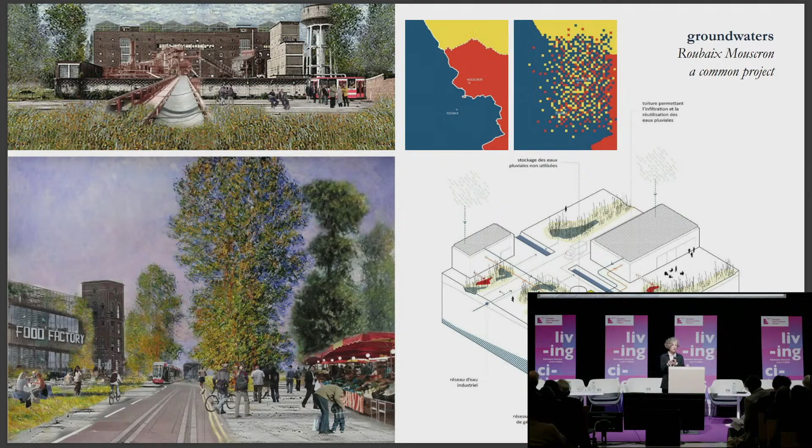The Flemish need new industrial areas, so it seems like a good occasion to make a European project to dissolve the frontier and open to a different type of collective or common project, which is not the case. It seems impossible to realize, but in fact, on one side we have available areas that need to be depolluted, and infrastructures like old train lines. On the other side, we have low-quality industrial areas that are flooded every day. And on the third side, we have entrepreneurs looking for industrial areas. So it seems that all the elements are there, but in fact it doesn't work.

So to conclude, this study brought four themes to construct a sort of blue park. The first theme is continuity. When you work with water, you work on continuity, and continuity is a theme that is not always present in our cities. On the contrary, we are mainly working on fragmentation and trying to reconnect something. By working with water, we are obliged to work on continuity.

We work on a composite of coexistences because water is life. Water is the presence of different types of living species, and you have to work with this heterogeneous condition that is our urban system. It's an ecological device, so there is something to be reconstructed in terms of life inside the water, but also in this capacity to be inhabited.

And not to forget, there is a fundamental question of upstream and downstream solidarity. When you work with water, there is always someone creating problems. Often, when you are upstream, you are creating problems for the downstream, and there is a question of solidarity. You need to bring into the territorial design the aspect of solidarity.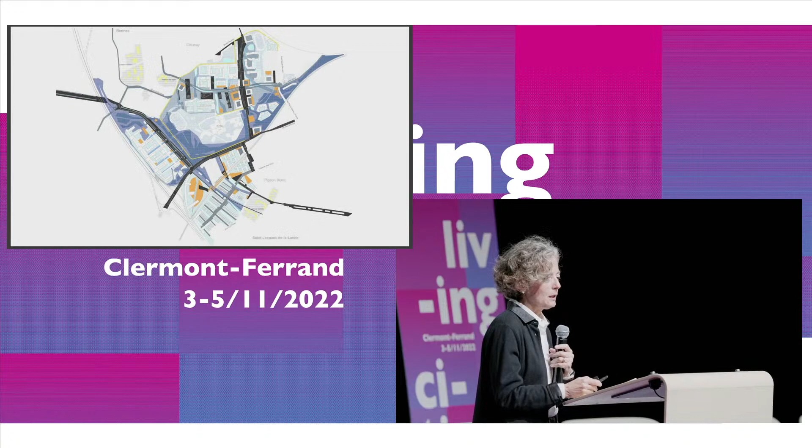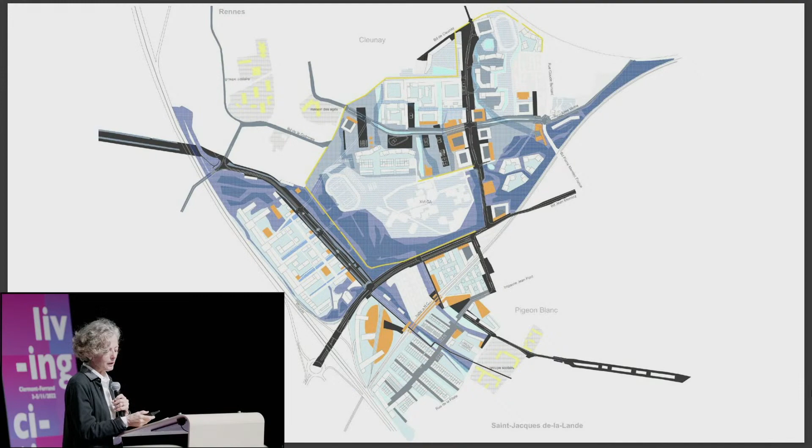The urban project is very much related to the previous map. In fact, we didn't follow a kind of geometric rationality, but we preferred to follow the rationality of the site, exploring a different type of project. And the water and the soil played the fundamental role in designing this neighborhood, especially the water trajectories: wadis, swales, basins, ditches, dry, semi-dry, semi-wet, and wet landscapes designed the project.

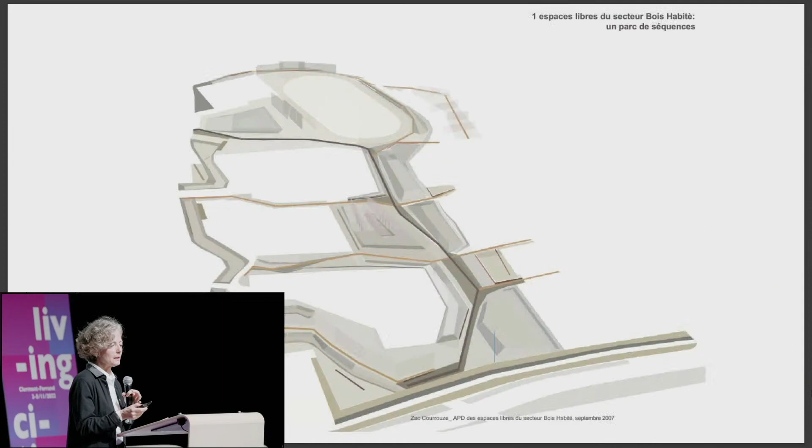So the fundamental operations of the project are, first, the ground balance: what you excavate, you use somewhere else, apart from the very heavily polluted parts. And from the point of view of the water, we had to respect the law about water, so you could not evacuate water more than a certain amount, 3 liters per second per hectare. Practically, we had to transform this place to make an urban part from this site, but this site had to behave as an agricultural soil. That's the meaning of 3 liters per second per hectare. This means that we use topography, this new topography.

We had to reconstruct the topography because the soils were polluted. We had to reuse part of the soils to organize these dry, semi-dry, semi-wet, and wet areas to collect the different water coming from the new housing.

So you see on the left the very dry areas, the semi-dry, semi-wet areas, and the very wet areas. So in the space of a very small public green park, you can explore all the trajectory between the dry and the wet. You can imagine there is a biodiversity related to this passage from dry to wet. But what is also interesting is that we did this by importing a very small amount of organic soil.

Now we walk a little bit inside the project, just to give you an idea of this work of cut and fill, the work of imagining putting the buildings where there was already space, so not concluding. I think I have to conclude.

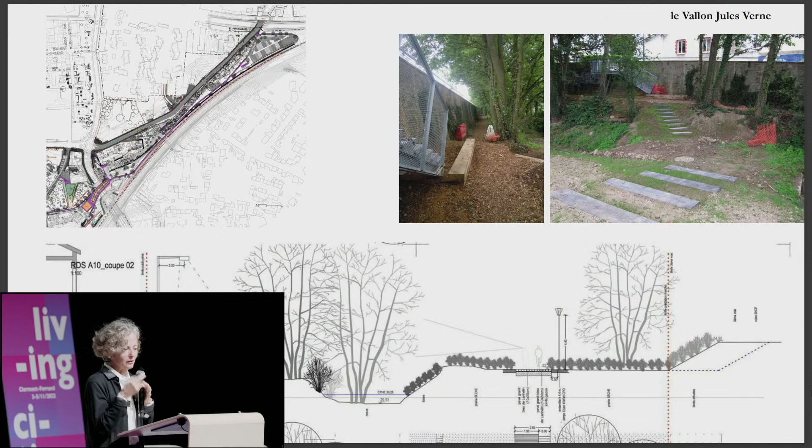There is a message here. Just give a look at the pictures. For example, there is a small valley arriving at the center of the city, so this becomes the occasion to requalify. We collect the water coming from the existing neighborhoods.

We requalify the small water course in the lower part, but there are also some paths along it. You can requalify also the old railways that were passing there. This becomes an incredible place. And of course, you discover other stories, but I don't have time to bring those stories to you.

This is together also with this respect for the trees, because when I say water is a subject, you can imagine that trees are also subject, that soils are also subject. This is a profound ontological transformation, when you consider them as subjects.

Some of the spaces related to collecting this water are earthworks, important earthworks that can help in collecting this water, but also create occasions for small projects of public space that go together with them. For example, you just raise a little bit, make a very subtle dike, and you can gain a lot of capacity to stock water. This small path has been conceived as a small dike going through, defining basins where you can stock water. So look at the image on the upper part and look at the transformation in the lower part.

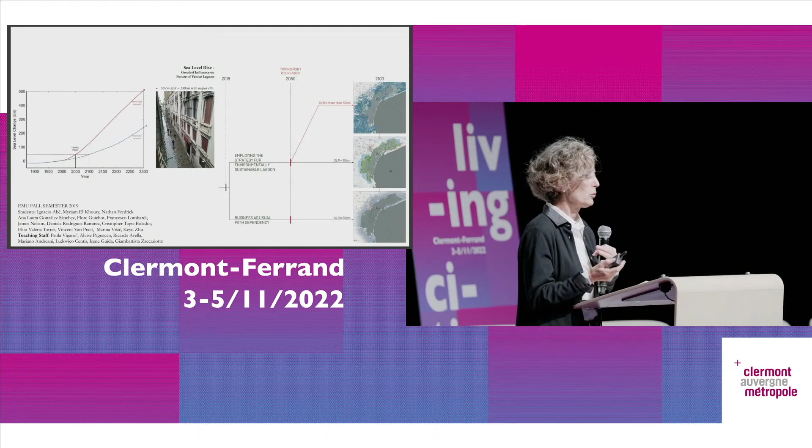If we want to save Venice, as I've said on other occasions, you have to save the planet. There is no other way. Because the only possibility for a future for Venice is that sea level rise does not go beyond a certain height, 50 centimeters. In order to maintain sea level rise inside these 50 centimeters, the whole planet should change—emissions and temperature should not continue to evolve, and sea level rise should remain more or less inside this plus 50 centimeters.

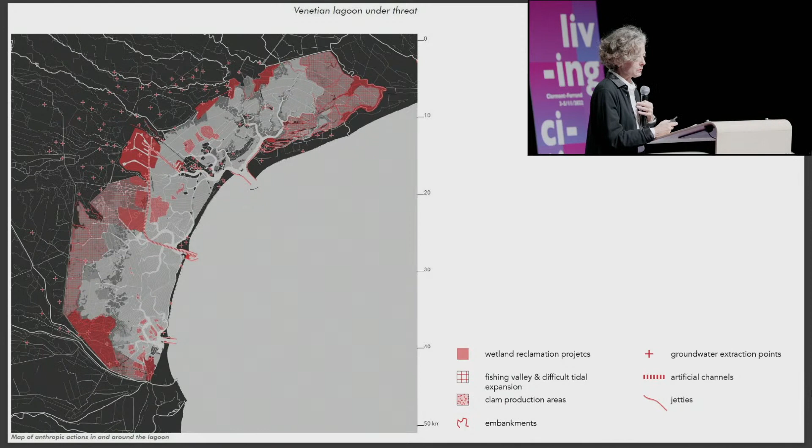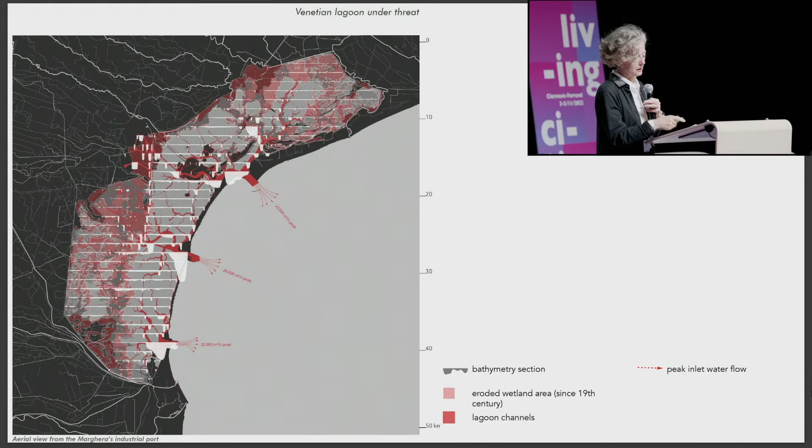Amphibia is a utopia. We described Venice and all the threats that the lagoon has to survive—the loss of the wetland, the very bad impact of the artificial channels, the new jetties that have been built to try to save Venice, but will probably not save it. There is a progressive erosion of the lagoon, which is becoming practically a piece of the sea, creating other problems.

There are peak inlet water flows that are very violent, which is also devastating for the architecture. There are different scenarios for Venice. The first scenario is to transform the lagoon into a lake, closing the mouth to make a sweet water lake. I think this scenario is problematic.

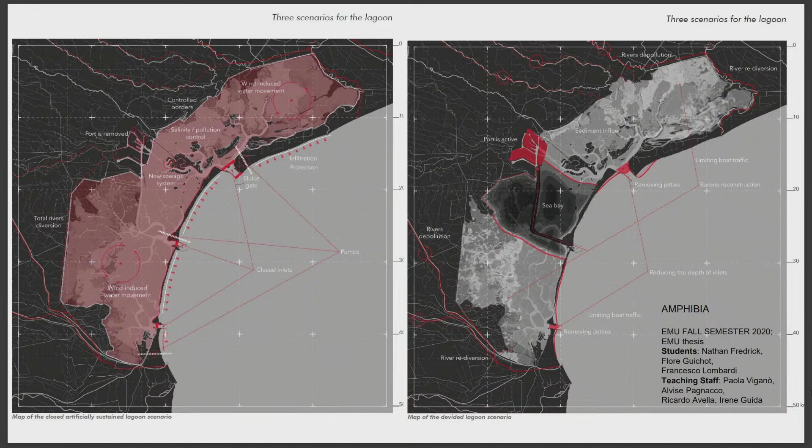There is a second scenario: you see, in fact, the sea is already inside the lagoon—you see the sea bay, the black part. So why don't we save a piece of the lagoon? The red line shows where we close it. We can maintain the industrial area of Marghera because it will have its canal going towards the Adriatic Sea, and we can eventually also close the lower part. So we'd have this kind of fragmented lagoon—one part will be sea, and you can continue your economic and industrial activities.

But Amphibia has a different idea. Here we imagine that we can live with the water, if the water does not rise—if all the planet makes efforts and we remain inside the 50 centimeters of sea level rise. In this scenario, we demolish the jetties. We remove the harbor and say you cannot have a harbor in a lagoon—put it somewhere else or use other harbors that already exist.

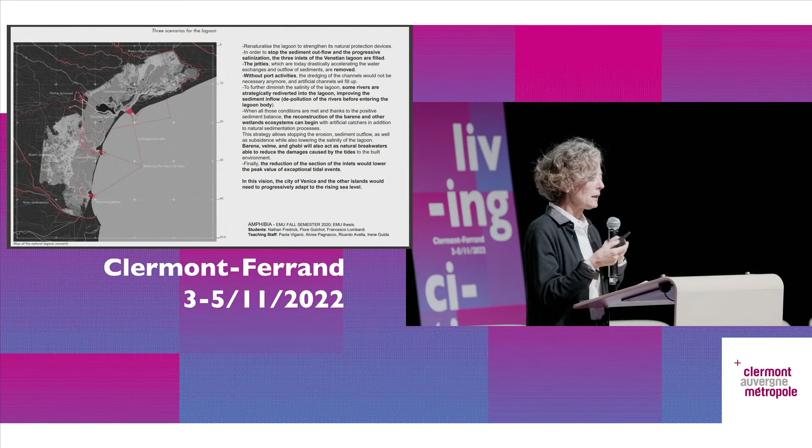Maybe some of the rivers that have been diverted in the past, we put them back into the lagoon so that sediments can feed it, because the lagoon today is too deep, and this erosion is also creating problems for Venice. So we propose a series of radical interventions in order to make it possible, once this is done, to start the renaturation and restoration of, for example, all the wet areas that are fundamental for lowering the speed and strength of the water entering from the sea.

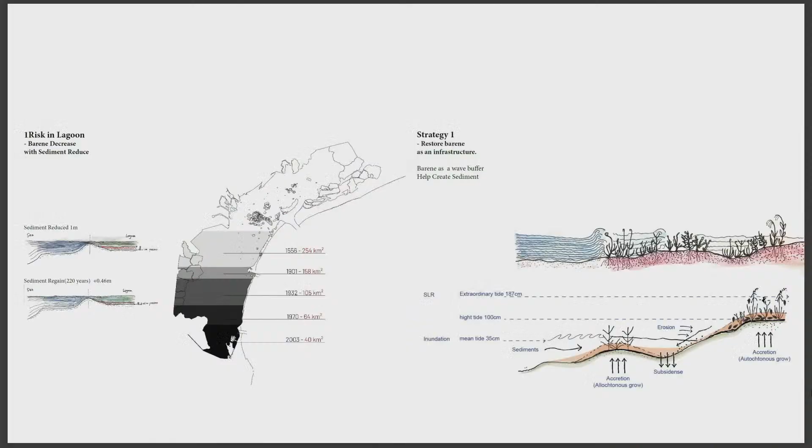So we restore the barene—that's the name—and bring new sediments to slow down the strength of the waves. But you also need more space for this water. So you have to go back to the reclaimed land, reclaimed mainly starting from the 19th century and then in the 20th century. Today, to keep those areas dry, we spend a lot of energy—the same energy consumption as a city of 100,000 people, just pumping the water out.

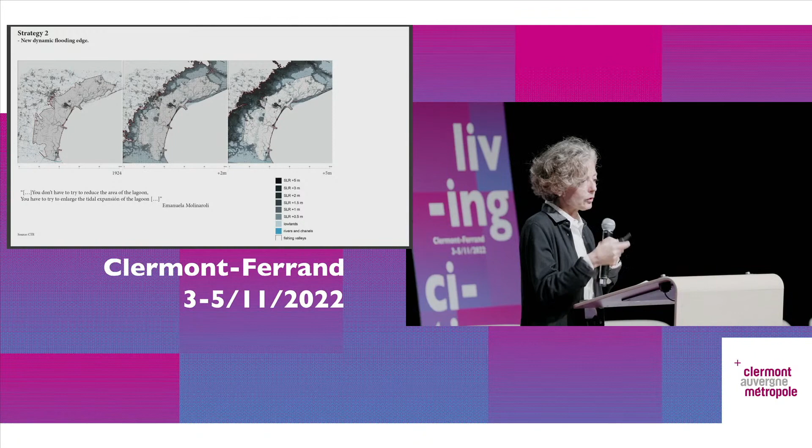There is agriculture there, but maybe it's too expensive. Today we cannot imagine having space that is so costly in terms of energy consumption. So we give more space inland to the lagoon, which is also a way to create a new dynamic flooding edge.

And then the different blue is again a half dry, half wet water landscape, and from there the journey of this person that came back from Amphibia and tells us how Amphibia was. There is a video, but I'm not showing you the video, just some images.

Now, the Venetian Republic followed a trial and error method. They knew very well that it was important not to create deadlocks that could impact in a negative way the hydrologic mechanism of the local ecology. So in any case, there was always a trial period in which all the effect was monitored.